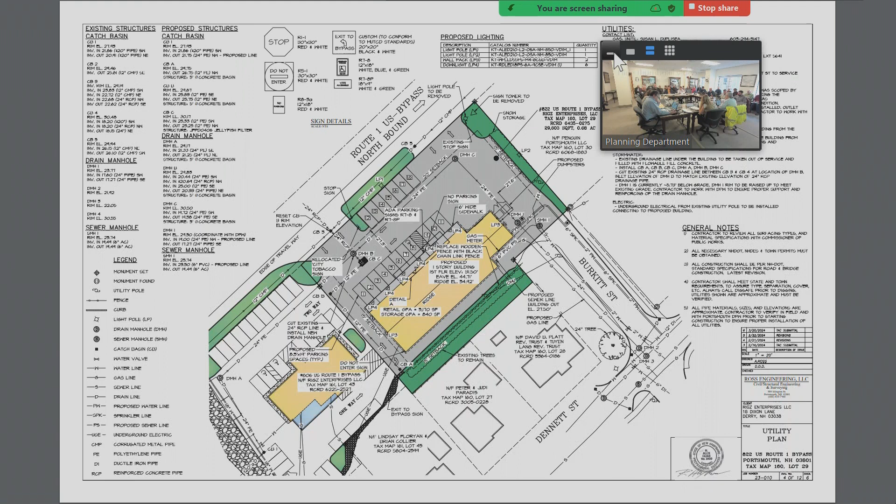The second item deals with the water line: change the 6-inch fire service into a 6-inch main with a flushing hydrant at the end. We can definitely add that information and notes to the plan.

Next item is third-party oversight of work in the city right-of-way may be required, so we did want to discuss that. Mac Construction, who's done a lot of work for the city, did a lot of work on this site to remove the tanks, and he will be doing the work. That's just an additional expense we don't feel is necessary. Of course, there will be city inspections, and he'll be working closely with the city while doing all the work on site.

Next item is that Burkitt Street will need to be milled and overlaid after the conclusion of the utility work. We can add notes to that effect on the plan.

We also wanted to have a discussion, not sure if this board has the authority, but regarding putting the utilities in Burkitt, repaving all of Burkitt, redoing all the off-site drainage that comes on site, and repairing all the catch basins, putting in new ones, as well as repairing catch basins in the bypass — it's at a considerable expense.

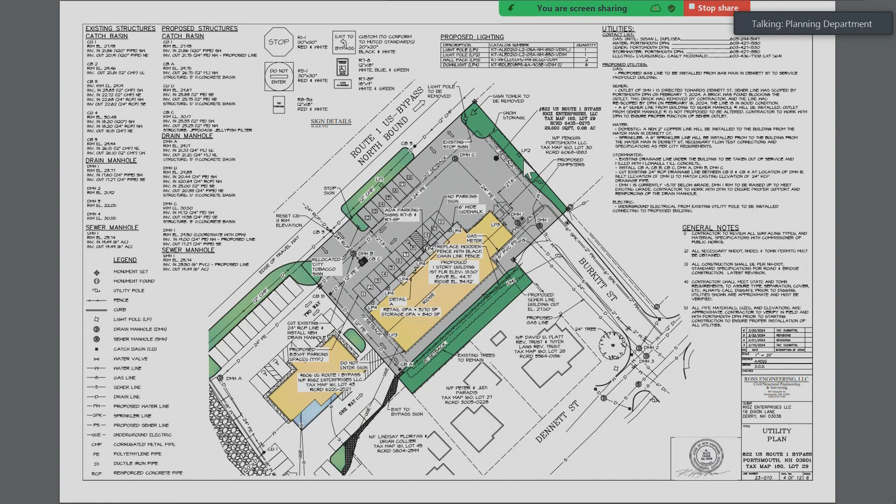Alex, just on that, do you think—I mean, that plan expires in June. You've already gotten one-year extension? Yeah, I think we can wrap that up prior to that, so we don't need to—yeah, that's pretty minor.

The next item was utility plans need to be updated to show utilities in pavement area, and that was the same as an earlier one, so we've actually since done that and uploaded it, but we'll make sure that's clarified on the plan. So I think that's it on the items. Any additional comments?

I just want to make sure we don't lose something. There's multiple off-site properties that drain through this lot, and then the drainage goes down Burkitt Street into the city system. So all the permanent drainage that gets installed needs drainage easements for all the multiple properties that drain through this lot. I'm not suggesting necessarily that it's a fixed easement, but something needs to be memorialized that allows that to happen.

I think initially we had talked about all the issues on this parcel, so we were planning on doing a drainage easement, an easement to allow Burkitt to pass through the property, because currently there is nothing. And then there's also the fact that there are existing city drain and sewer structures on the property, so we plan on working with the city to get the correct easements in place.

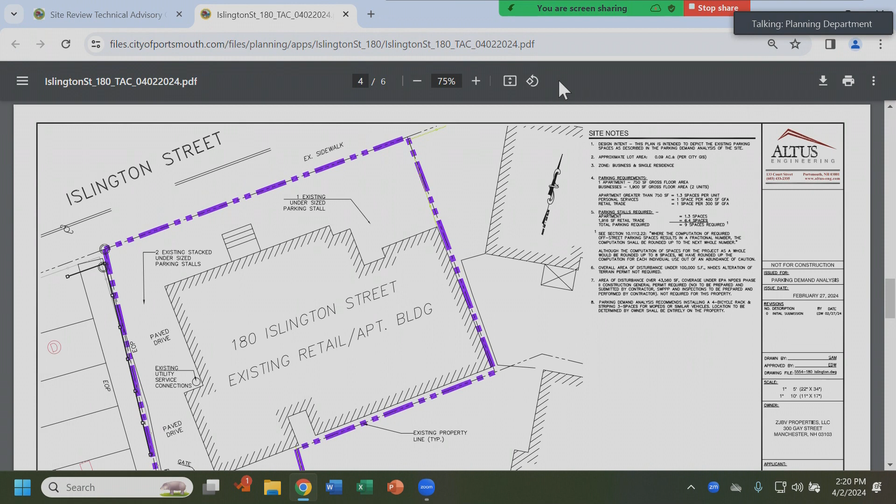Altus Engineering, Eric Weinrieb is here with us. They prepared a plan and a parking demand analysis, which we believe indicates that the amount of parking required for this space vastly exceeds what would be necessary given the available off-street parking in the immediate vicinity and the proximity both to downtown and to the parking garage.

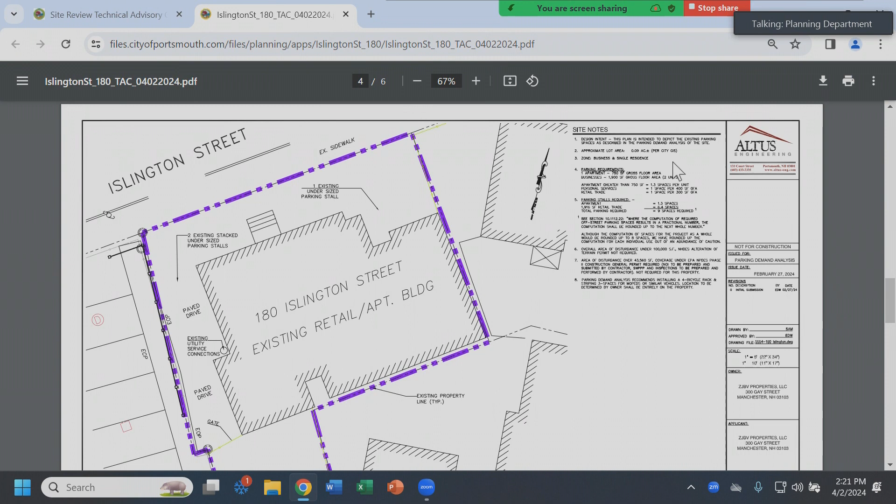What we have provided you is the tax map, the site plan, and the parking demand analysis. The site plan shows the existing configuration of buildings on the property does not afford us any ability to have conforming parking spaces.

What has traditionally occurred on the site is people have parked to the right of the entrance, as you're looking at it from Islington Street, in a driveway. There have been two stacked parking spaces, or two stacked vehicles, parked there on occasion, and then we have another non-compliant space to the left of the entrance.

Again, none of these spaces meets code, so for our purposes, and for what we're requesting from the planning board, a conditional use permit is for 0 spaces where 9 would otherwise be required.

You have received some public comment I'd like to address real quickly. One was primarily that the non-compliant parking spaces in use on the property should not in any manner conflict with the sidewalk.

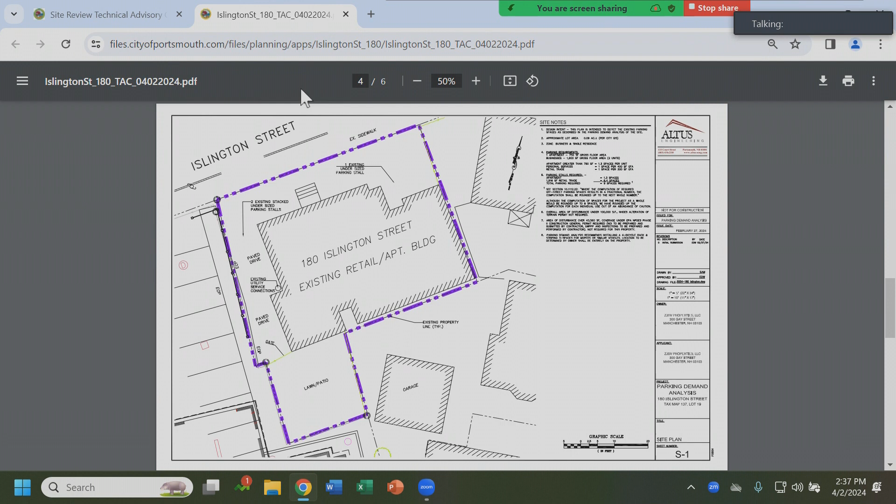All right, let's open it up for any public comment. Is there anyone here or on Zoom wishing to speak to this application? Seeing no one, we'll close the public comment portion and open it back up for discussion.

So I guess the question is, is that handicap space required, or is it for this? It's a good question, I don't have a definitive answer on that.

I think the planning board needs us to review it and just see whether it can go forward. I don't have a problem with proposing it go forward to the planning board for their review. I think addressing the demand analysis - would we want to see that again? No, I think either way it's fine. 2 or 0 spaces is all we would support, is what I think they've heard. So I'm comfortable making a motion that we support sending this forward to the planning board.

Certainly with the condition that any parking does not block the sidewalk. Good, yep. Was that a second? That'll be a second, yeah. Any additional conditions, or is it?

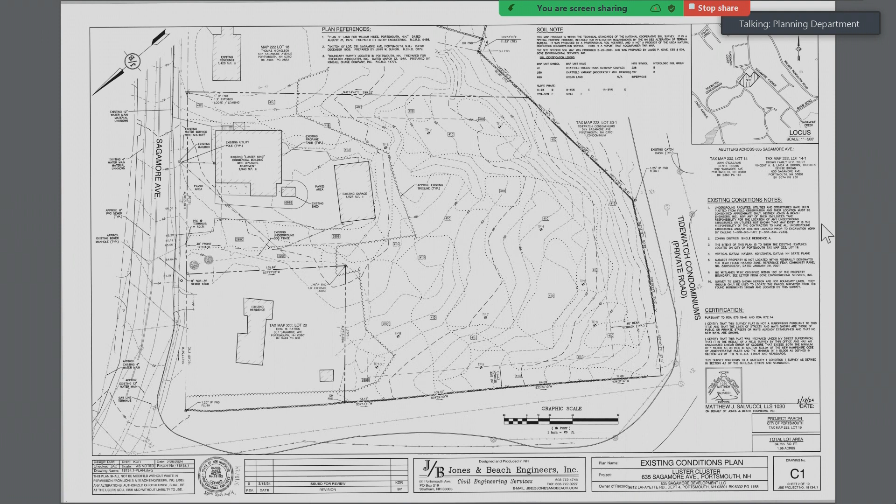So we discussed that. We've been working with Eric quite a bit, which I appreciate, on different sightline distances, profiles, stopping sight distance, intersection sight distance, and we've come up with what I think is the best location for the driveway based on all the back and forth and all the profiles we did. So now the driveway is proposed on the northern side of the property, which is basically the low side of the land, furthest from the peak of the hill.

And it's still a 4-unit condominium development - it's 4 single-family homes, a really short little driveway with a turnaround. It'll obviously be a private drive. And with that, we have designed the sewer and the water, currently showing propane tanks for the site, which I think is one of the questions this committee had: are we planning on bringing in propane?

We talked recently about bringing in natural gas. Right now, the natural gas ends at the southern side of the Tidewatch driveway entrance, and we'd have to bring it up the road in front of 607 Sagamore, basically, and then into the site, which we're certainly willing to explore. I know our time frame is quickly vanishing, given that you're doing all your finish work on Sagamore. So that was something we'd like to discuss.

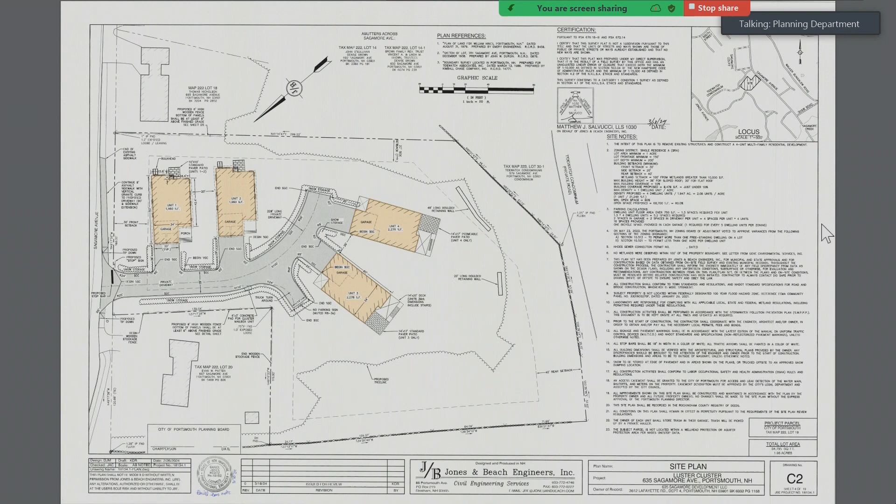Peter, do you mind switching to the utility plan? I think the best location to bring that gas main would be under the sidewalk. There's a sidewalk from Tidewatch that runs up towards the Luster King.

If we keep it in the road, we end up having to cross your water main, and I'd assume you'd want to not do that. Talking with Severino today, they are removing that. The sidewalk project goes all the way to the Tidewatch entrance. So it would seem like the only place to really bring it up the road would be under that sidewalk and behind that utility pole that's right in front of 607 Sagamore, unless you want us to keep it in the road.

If that's a good location, we can drop a sketch and try to get it to Unitil in time. If this doesn't work out, we're perfectly fine with sticking with the propane tanks that we have - buried propane. And if that ends up being what has to be, it's not the end of the world for us at all.

The other aspect was a similar comment relative to the water main, water service to this development. And the request was to put it into the driveway. We can do that. We've got to shuffle around some of the utilities down there - we might have to move that first sewer manhole further into the property a little bit so we can get our 10-foot separation.

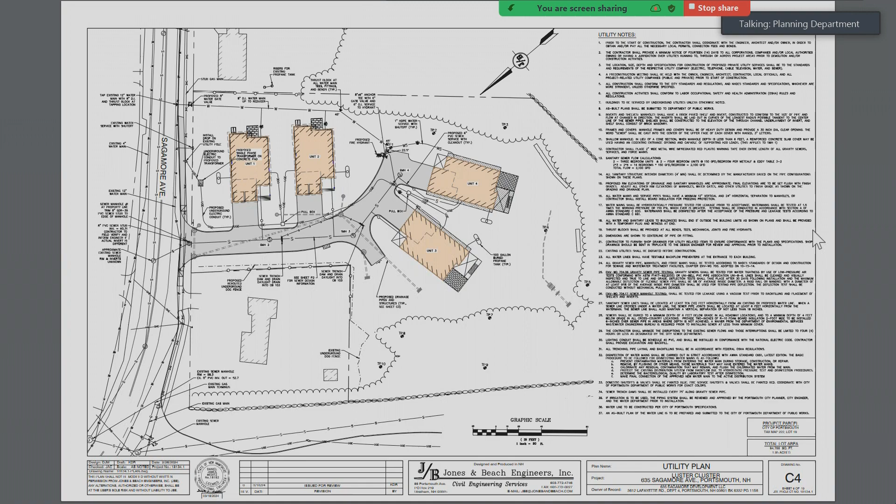We can combine the hydrographs as suggested. We can change the outfall to bioretention pond number 1. The reason we had it in the location we did was so that...

as noted in the report, and as I think all the Tidewatch residents know, the water basically runs down their driveway on the uphill side of their drive, kind of follows that curve, and basically heads towards their mailbox, their mailroom, sometimes probably going out into their road, because the ditch, if there ever was a ditch in that area, it's kind of gone. If there never was, then it's probably been occurring for quite a long time.

We put it in that location, the outfall to our bioretention pond number 1, just so the length of time of concentration would be increased for treatment, but we can certainly put that outfall on the other side of the pond, closer to where the water eventually goes, so it's not running along their driveway as long.

And I know Mike Garapi and Paige from my office did have a meeting with the Tidewatch Condo Association just last week, right? And I think they discussed a lot of these items also. And I think we'd probably have to do that a little bit more, maybe have another meeting. There was talk at that meeting about a culvert being added.

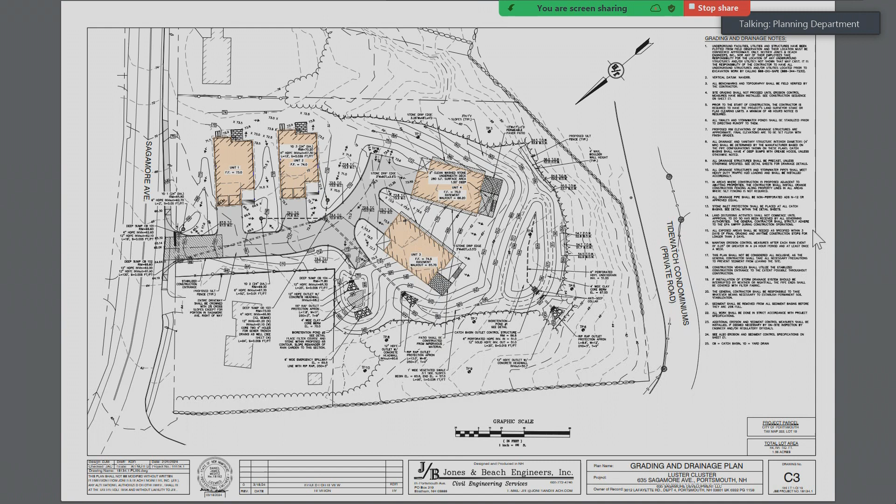And then I believe, based on the emails I saw—I was out last week—but I believe Tidewatch has engaged to work with John Chagnon to review all the drainage. So there will be a third-party review of the stormwater being done. I think they're the ones that would mainly have any concerns, so I would hope that would be adequate for your third-party review, as he'll be clearly looking at their stormwater and hired to do so.

And I think that's where we can solve some of the items about the soil groups, whether we're going to add a culvert, where would it go, would it tie into a catch basin, would it go under the road, what utilities are in Tidewatch's roadway—which are probably all of them—that we'd have to cross.

If we were to do something like that, there's definitely wetlands all along the low side of Tidewatch's driveway. I don't know if we'd have to get into conditional use permitting for all that work. I know they seem like wetlands now, but they seem like they're all constructed drainage ponds. I don't know if that changes setbacks at all.

It depends on the size. If they're less than 10,000 square feet, maybe not, but if they're wetlands, they're wetlands. I answered his question that if they're less than 10,000 square feet, they may not have a city buffer. But if they're more than 10,000 square feet and delineated as wetlands, they would qualify and need a 100-foot buffer, so a wetland conditional use permit for any work in that.

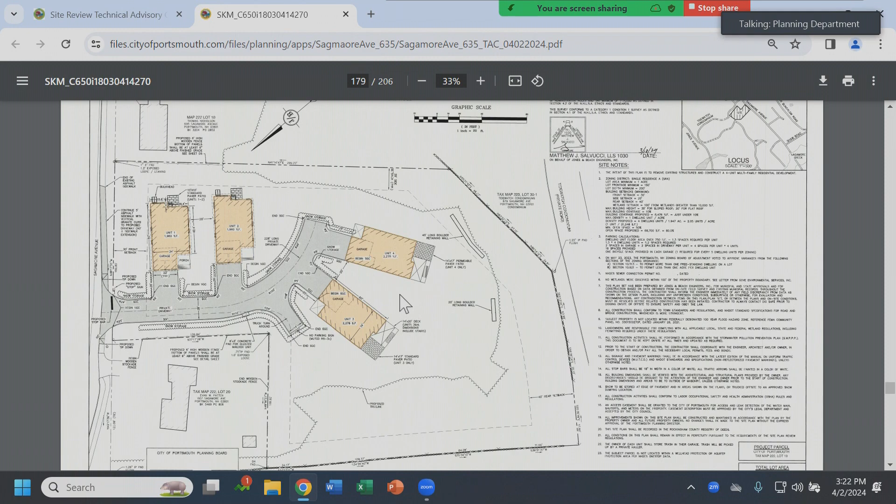When we had the final build-out, 2008 through 2010 was the final phase, the city was there every other week, practically inspecting that we had to get that drainage ditch out into Sagamore capable to carry the expected volume. So we had to expand it, dig it out — there were a number of things. I think all these things need to be addressed before there's any stamp of approval.

I want to give these people some information that will say, maybe we had better look at this a little harder before we put a final plan out. I want to protect the hard work that many of these people who have been here at Tidewatch since the very beginning have gone through our build-outs to preserve the property and make it what it is today. So, thank you.

Do you agree with me? As usual, your counsel was great.

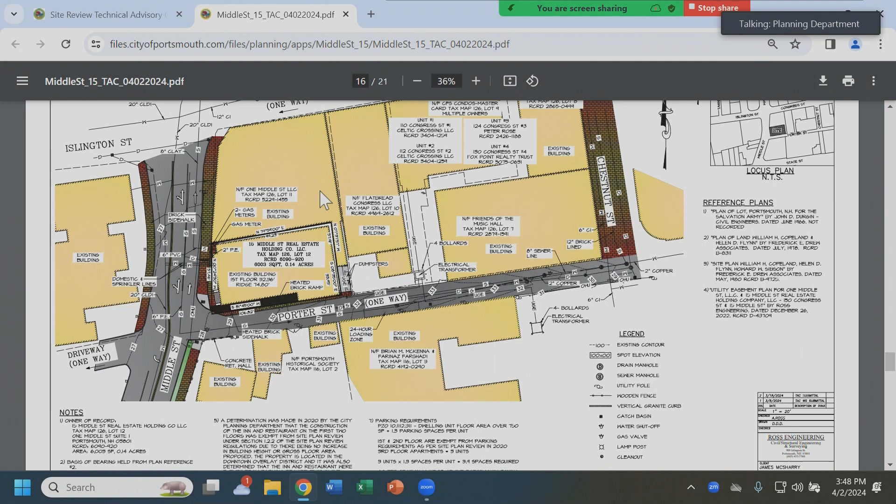Please provide information about sustainable practices. So we did submit something just today from the architect that listed everything inside. Okay, the next item is provide the development agreement from Juliet Walker for planning board application. So we did include that in this, and we will include it for the PB application as well.

Next item, please provide waiver requests for site review agreement and associated surety. So we updated that waiver request letter, and that was submitted as well. I think that's about it. This is a super easy site.

Sure, okay. Any other comments or TAC members, Pat? I'm just trying to wrap my head around what we're looking at here.

I remember when this came up the first time, and if my recollection was correct, the concerns were the lack of parking and what that might do with what are some difficult intersections that are well-traveled, and also some of our primary response routes for good portions of the city. How has that been addressed? I don't really see much information on that.

Right, and this one kind of had an odd route through the permitting process, but way back when, we did do traffic studies. We were gonna have off-site parking, valet, all these different things, because in that go-around, parking was required. In this configuration of uses and number of units, there's no parking required.